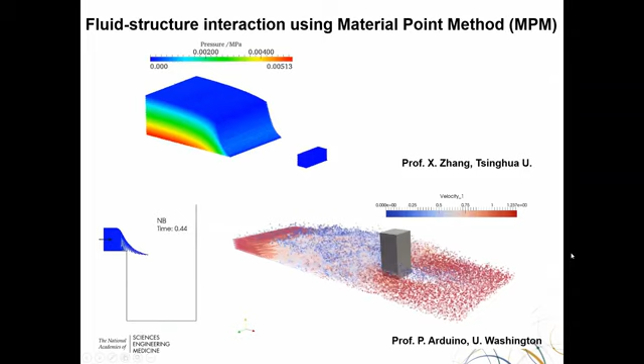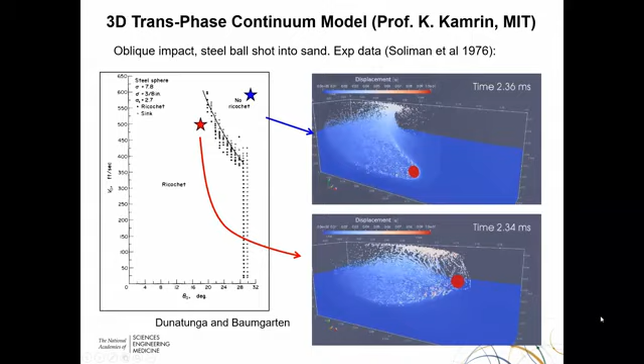In this presentation, I'll show some simulation examples of different failure types.

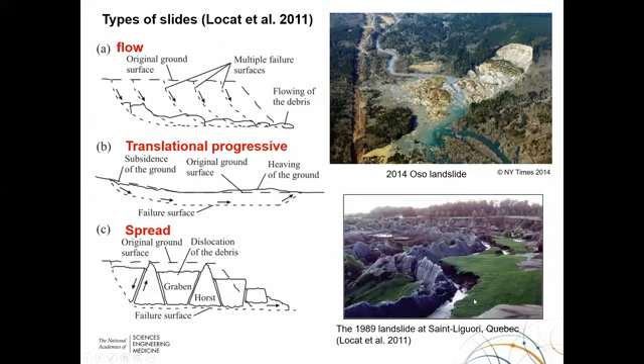Another large deformation modeling application can be failure of levees, which requires soil and water interaction modeling. I'll present some simulation of the levee failure later on.

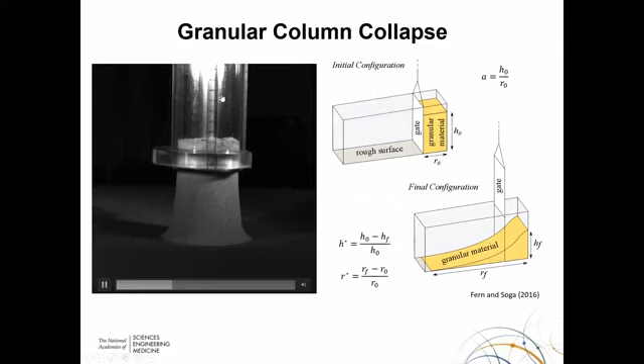A simple physical model to show a flow slide is to conduct a granular column collapse test. Here, a sand column confined in a cylinder is suddenly released to spread radially outward by the gravitational force. The soil mass continuously shears and spreads downwards and sideways.

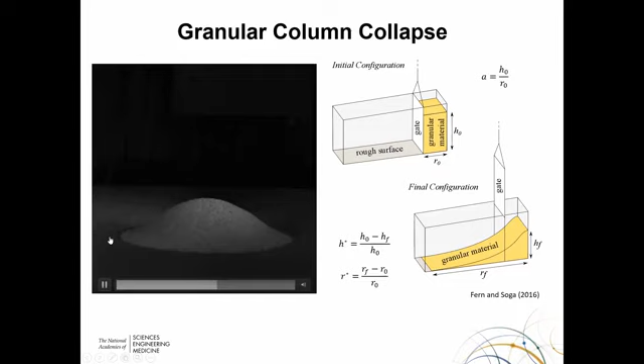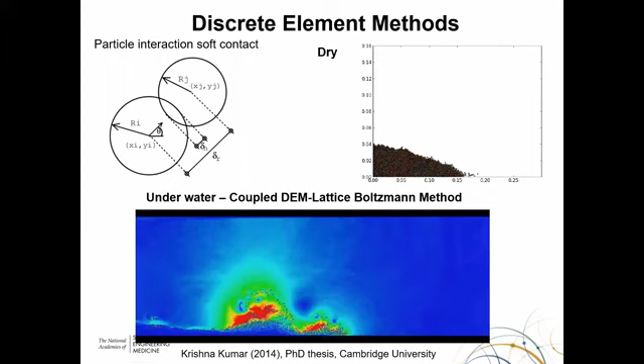The other option to model large deformation is to use continuum-based methods in which the conventional finite element method or finite difference method is replaced by other numerical techniques, such as arbitrary Lagrangian Eulerian, coupled Eulerian Lagrangian, smooth particle hydrodynamics, particle finite element method, and material point method, MPM.

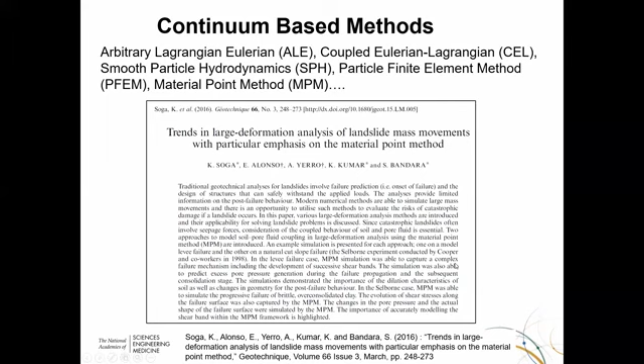I do not have time to go through each of the techniques today, and for those interested in knowing more about it, please have a look at the paper by Soga et al., published in Geotechnique in 2016. The material point method, MPM, which was proposed by Professor Sulsky of the University of New Mexico in 1994, is one of the methods to conduct large deformation analysis.

In the first step, the entire mass is divided into a group of mass points. At the same time, the computational spatial domain is divided using a background mesh connected by nodes like a finite element mesh.

When a computation starts, the information such as mass, volume, and stress of each material point placed inside a given mesh are mapped to the nodes that are associated to the given mesh. The equilibrium equations are solved at the nodes like the finite element method.

The acceleration velocity field obtained at the nodes are used to compute the strain and strain rate at the material points, and the stress state is updated by a continuum-based constitutive model, like Camclay. The density of the material point is recalculated according to the volumetric change of the material point. The mass of the material point is always kept constant to have mass conservation.

The acceleration and velocity field also provide the convection term, that is, rigid body movement of the points at a given time step. Using this convection term, the material points then move to new positions, and then the next step of calculation is performed.

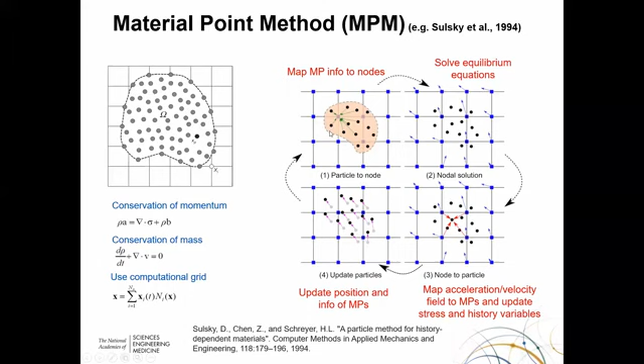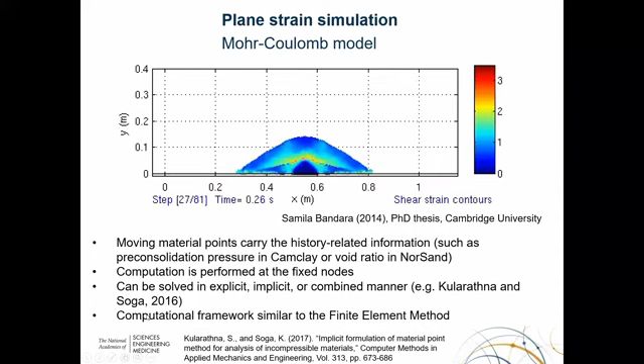The unique feature of MPM is that moving material points carry history-related information such as pre-consolidation pressure in Camclay or void ratio in NorSand. Computation is performed at the fixed nodes, and the numerical discretized equations can be solved in explicit, implicit, or combined manner depending on the problem. So the computational framework is similar to the finite element method.

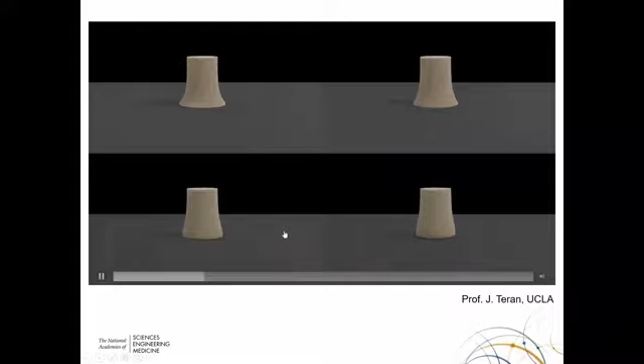The model is history-dependent, where the history variable is plastic deviator strain in this particular case. It is important to note that in this model, the soil behaves elastically until the shear stress mobilizes to peak friction angle.

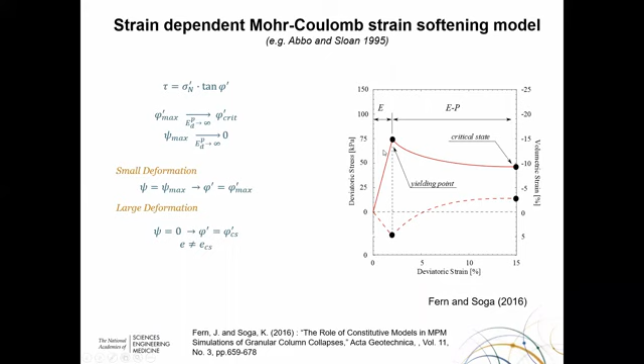Another alternative to model strain softening behavior is a model called NorSand, proposed by Jefferies. The model utilizes the critical state concept. Its mathematical structure has a yield surface on which the current stress state lies, and an outer bounding surface determined by the current void ratio or state parameter. The relative difference of the two gives the plastic hardening process. Using this concept, it is possible to have plastic deformation from the start of shearing, rather than after peak strength as in the Mohr-Coulomb strain softening model.

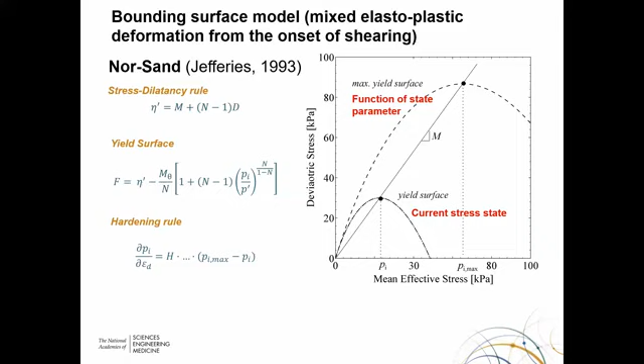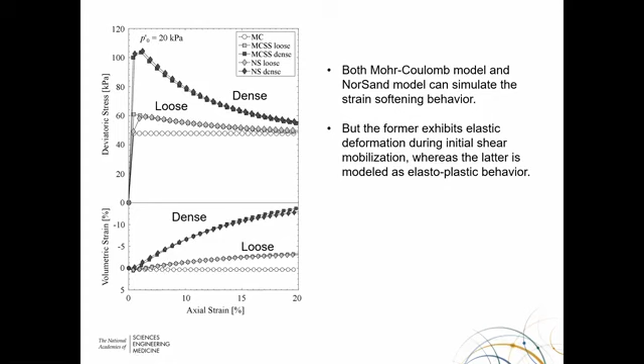This means that if we have strain softening behavior of dense sand or relatively loose sand, we have two options: model it with the Mohr-Coulomb strain softening model, or use the NorSand model. The former exhibits elastic deformation during initial shear mobilization, whereas in the latter, the entire process from the beginning of shearing is modeled as elastoplastic behavior. Both models contain history variables, so the use of MPM is attractive to simulate the large deformation behavior of granular collapse.

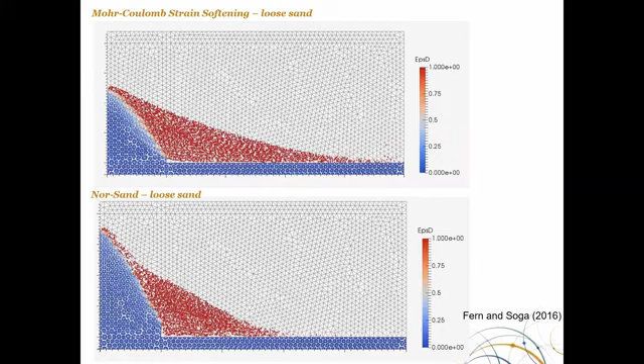Here we see two simulations using the two models. The modeled stress-strain relationship is from the loose case shown before. The top is the Mohr-Coulomb strain softening model, whereas the bottom is the Norsand model. The failure mechanism looks similar, but note that the runout distance is smaller for the Norsand model. This is because plastic dissipation in Norsand occurs from the start of shearing, whereas for the upper one, plasticity only happens when the stress state reaches the Mohr-Coulomb failure line. The results illustrate the importance of considering plastic deformation and energy dissipation mechanisms for this particular problem.

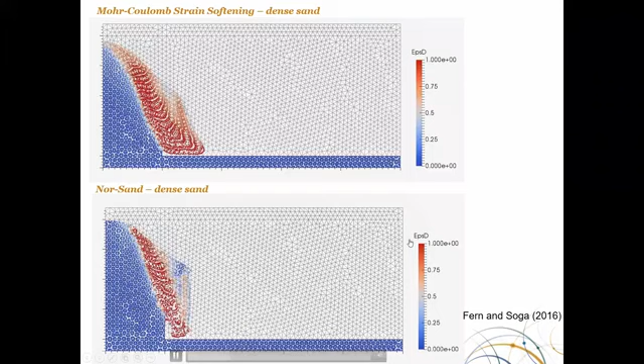As discussed earlier, strain softening behavior is one of the ingredients to initiate localization, bifurcation, and shear band formation. The progressive development of localized shear bands potentially leads to catastrophic failure, as seen in many landslide failures. The strain softening drained shearing of dense sand was illustrated earlier. In undrained conditions, large positive excess pore pressure develops during shearing in very loose soil or sensitive clay due to the contractive nature of the soil structure.

Seepage also leads to reduction in effective stress and softening of the soil. In dense sand or heavily over-consolidated clay, the shear band often exhibits negative excess pore pressure. However, since the shear band thickness is often thin, water can locally migrate from the surroundings, and the shear band itself becomes partially drained or drained. That is, the localized drained shear band within undrained soil gives softening.

The energy dissipated inside the shear band has to be converted to heat, causing local thermal expansion of the soil. Since the thermal expansion of the soil skeleton is smaller than that of the fluid, excess pore pressure can develop in undrained conditions, which in turn softens the shear band. This was discussed in the recent Rankine lecture by Professor Eduardo Alonso.

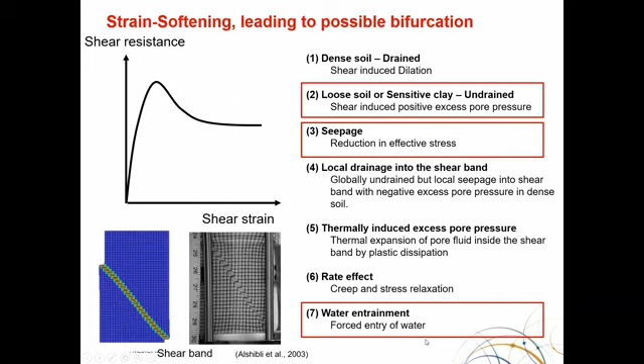The most well-known example of strain softening is landslide in quick clay or sensitive clays, in which large positive excess pore pressure develops during shearing due to soil structure collapse, as shown by the stress-strain relationship and stress path of such clays in undrained direct simple shear tests, presented by Professor Locat in 2015.

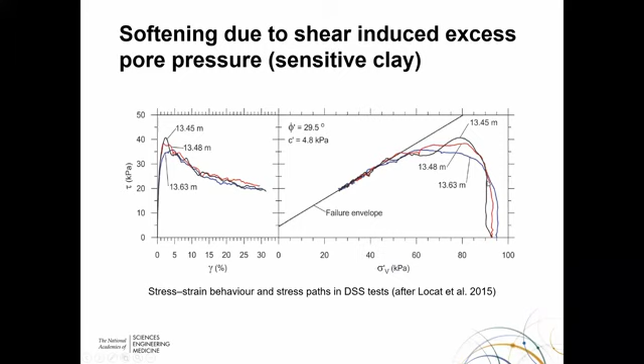Chen Wang and Professor Bipul Hawlader of Memorial University of Newfoundland implemented a strain softening model in Abaqus coupled Eulerian-Lagrangian large deformation code and simulated the 2010 St. Jude landslide in Canada. The progressive development of shear bands can be observed from their simulations.

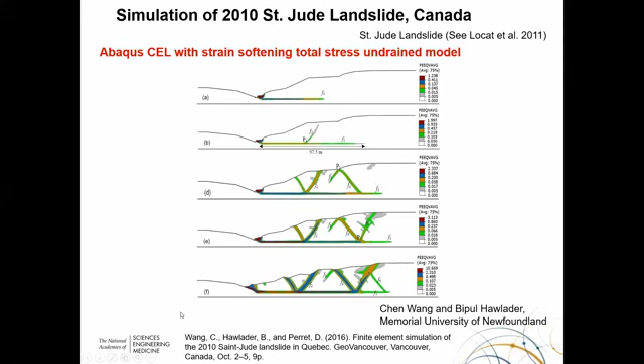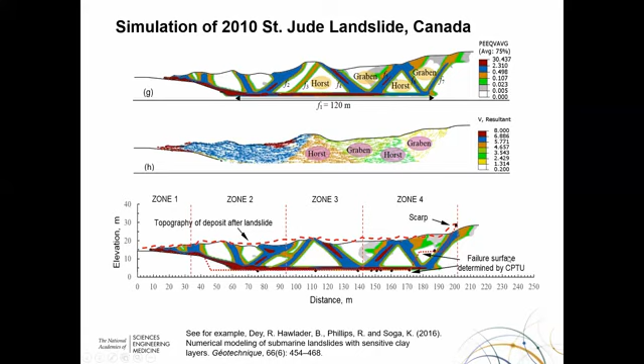This is the final geometry of the landslide. The horst and graben features observed in the field are captured. The simulated failure surface matches qualitatively well with the sliding location determined by cone penetration testing. The important point here is that large softening in undrained conditions and the initiation of failure on this particular geometry led to this failure pattern. Further details can be found in several papers published by Professor Hawlader.

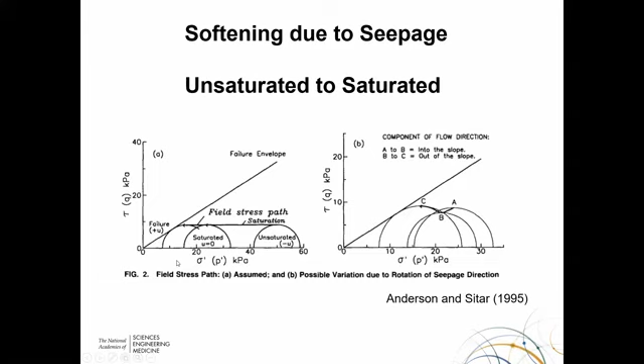We all know that seepage force reduces the effective stress, leading to softening of the soil. This happens in soil that starts from an unsaturated state, in which capillary forces at particle contacts provide apparent cohesion, which then reduces by saturation, and then further decreases its strength by decrease in effective stress. This is illustrated well in the stress path presented by Dr. Scott Anderson, who is moderating this talk, in their paper published in 1995.

There are two possibilities in MPM to include the seepage force. One approach is to model the soil material point as a mixture of soil skeleton, water, and sometimes gas, and each material point is partitioned into different phases. The movement of soil and pressure of the fluid phases are computed at the nodes. The other option is to create two layers of material points, one for soil skeleton and the other for water. We call this the two-point formulation.

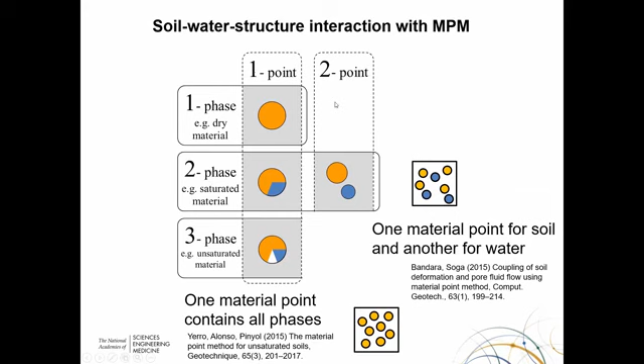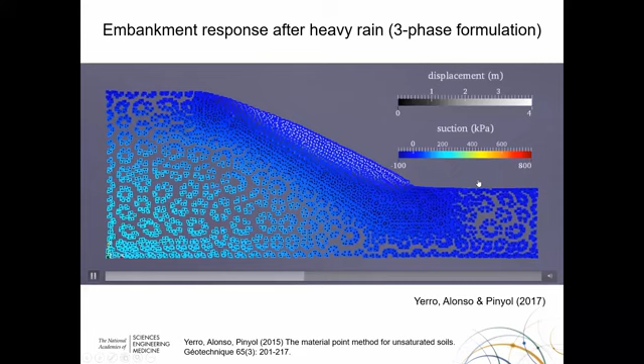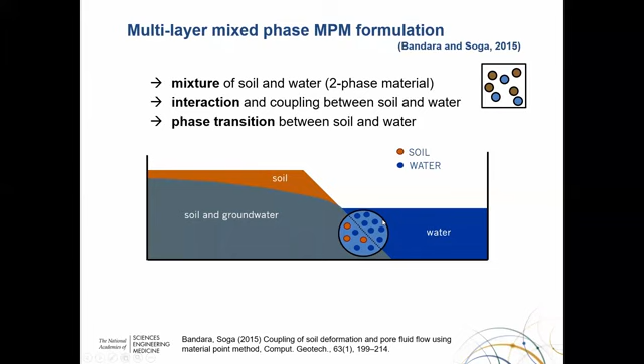The liquid material points seep into the soil porous medium. The seepage force reduces the effective stress in the soil material points. Then at some point, the seepage-induced failure starts, as shown in the red contours.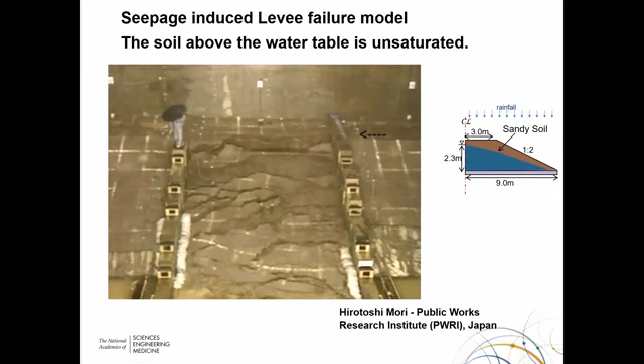In this two-point MPM model, the soil material point above the water table has a suction to keep the effective stress relatively high. If the soil material point crosses the water table and mixes with water material points, then the effective stress is reduced to zero as it loses its capillary force to bond the soil particles. This results in softening behavior.

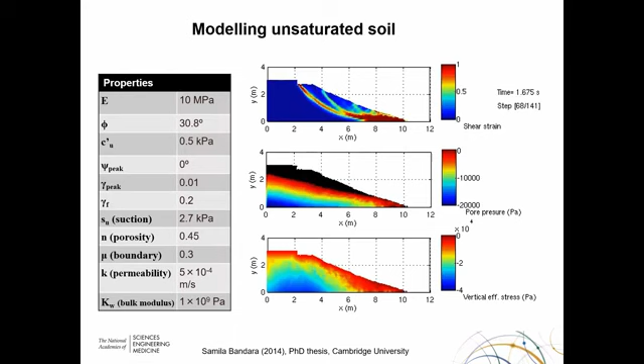If we artificially make the dilation angle a negative value, for example -5 degrees in this case, the soil becomes very contractive and positive excess pore pressure develops due to undrained shearing. This leads to catastrophic failure of the slope with multiple shear bands as shown in this animation. It is to note that this is just a simulation to show the capability of MPM. It is very unlikely a soil has a constant negative dilation angle.

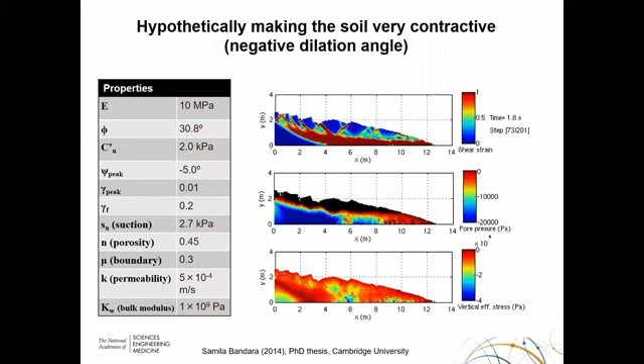The two-point formulation allows us to investigate interesting soil-fluid interaction problems. For example, one problem may be soil fluidization, in which the water volume fraction in the soil-water mixture becomes more than a certain level such that soil particles do not touch each other to transmit effective stress. Then the soil-water material becomes a liquid-like material. The cutoff criteria can be a certain value of porosity as shown in this slide, but other possibilities can be considered. Overtopping and erosion are also modeled using MPM as shown in this particular movie.

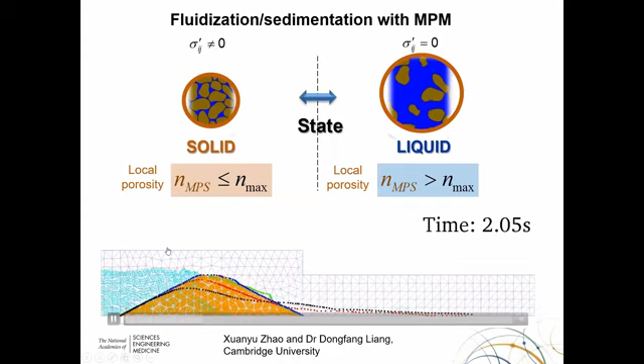Professor Teran and his colleagues created a very nicely rendered animation of seepage-induced dam model failure, with some cohesion applied in the soil particles.

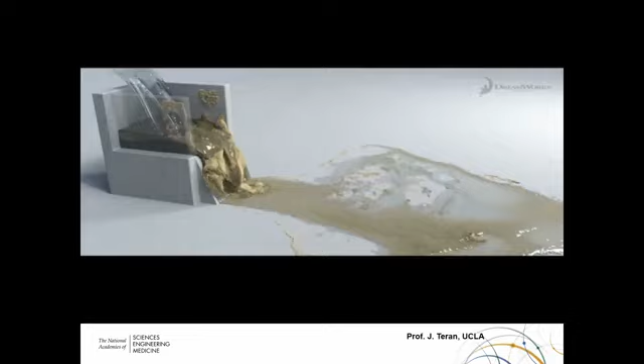MPM has a unique feature in which the material points, moving points, can be used for rendering. This is why it is attractive to be used for animation, with stunning images shown in this particular slide.

My final example is simulation of submarine landslide as shown in the slide. A movement of an ancient landslide was simulated. The source area was identified from the geomorphological feature from the bathymetry data. The aim of the simulation exercise was to investigate the applicability of large deformation MPM code to simulate such landslide.

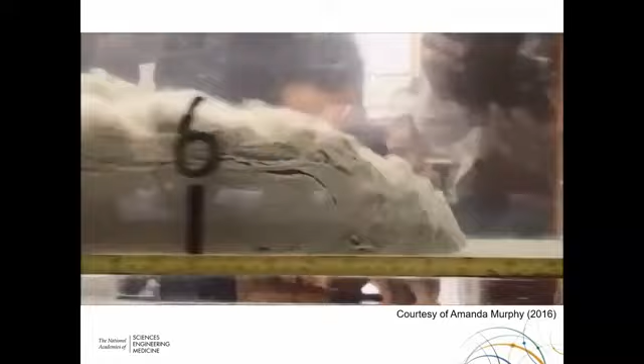There are several key features of submarine landslide, and they can be observed from this movie of a sliding clay model underwater. The interaction between the sliding mass and the surrounding water can be observed, especially the fluid drag along the top surface and the hydroplane-like feature at the bottom.

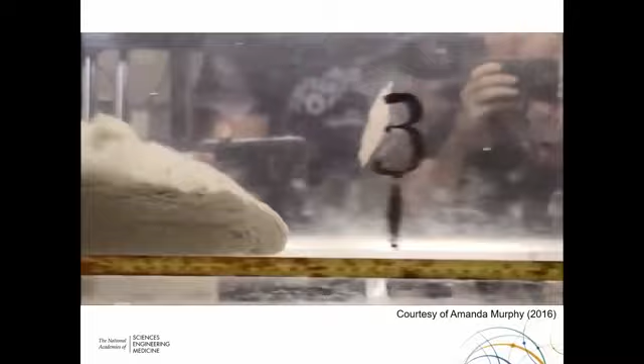We are more interested in water entrainment, which is an intrusion of water beneath the front of the runout. If there's mixing of water and soil, the basal resistance is reduced, which could explain the larger travel distance of typical submarine runout.

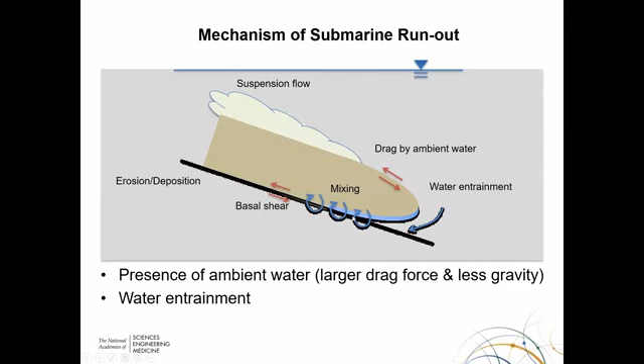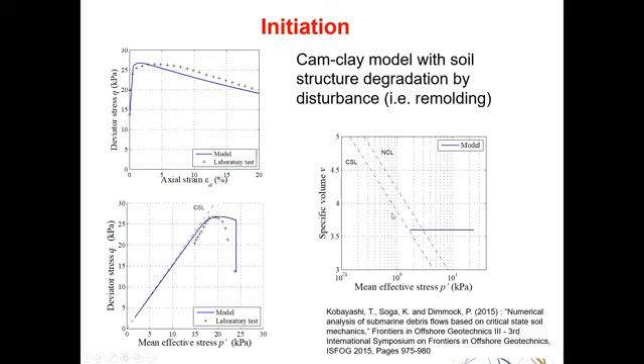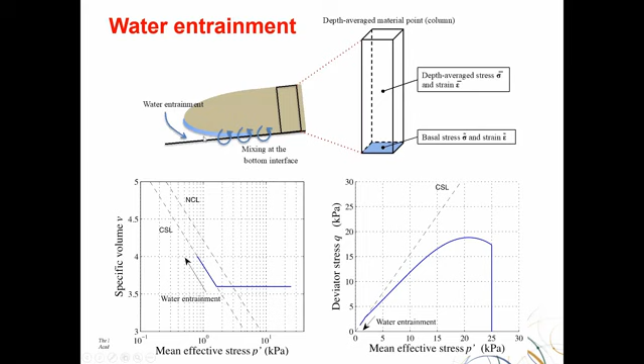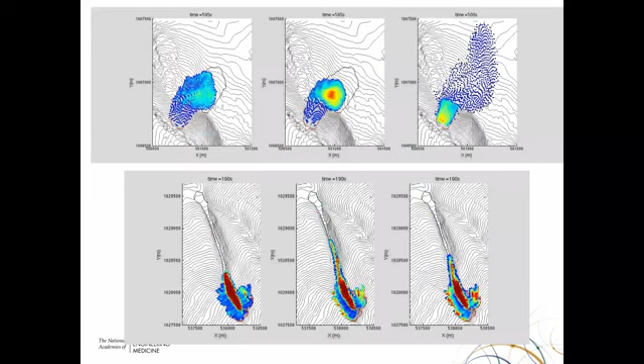These figures show various scenarios with different water entrainment conditions. As the figure moves from left to right, the amount of entrainment increases, hence the runout distance increases as expected. Again, the feature of MPM to incorporate a history-dependent constitutive model, in this case Cam Clay model, with water entrainment history is highlighted in this simulation exercise.

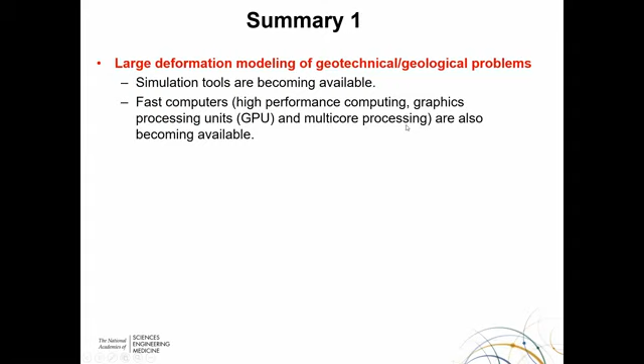This is a summary of today's presentation. Simulation tools to conduct large deformation modeling of geotechnical and geological problems are becoming available. These tools can be computationally demanding, especially for 3D problems. However, fast computers such as high-performance computing, GPUs, and multi-core processors are also becoming available, so they are within our reach to conduct 3D simulations.

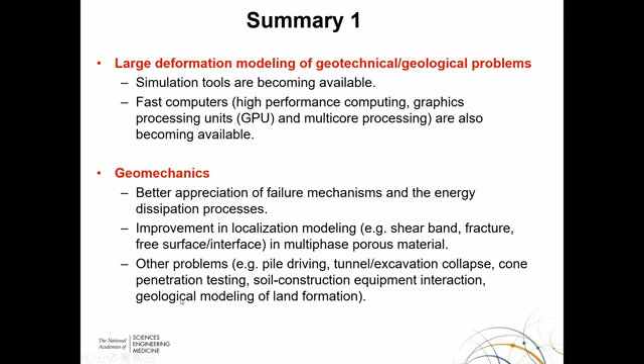Finally, I would like to propose that we need to have better discussion on the value of these large deformation modeling approaches to geotechnical and geological engineering and beyond. For example, what is the value in extending our conventional stability and deformation analysis to include after-failure stress testing analysis, that is, understanding the consequence of failures using these new tools?

Can we make better engineering judgments and aid stakeholders' decision-making processes using some of the stunning visuals that we saw in this presentation, or for better communication of results? If we do embrace these tools and approaches, I think we geotechnical and geological engineers have an opportunity to become the leader in this area.

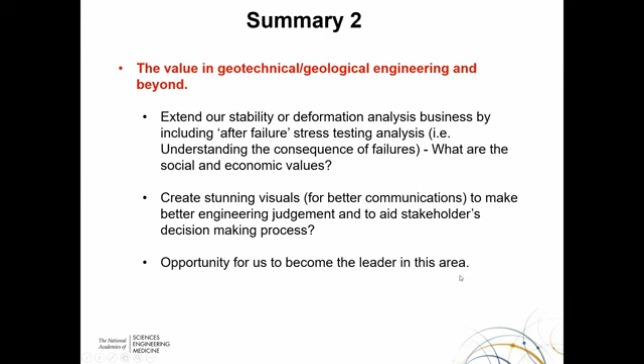If you're interested in this topic, the University of Cambridge team is hosting the second international conference on the material point method this coming January. The conference will have research paper presentations, training courses on the MPM code called Anura3D, and publication of a new MPM book for geotechnical engineering.